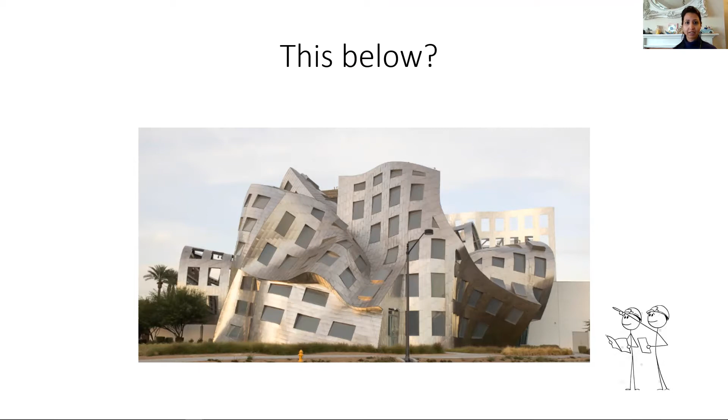Well, a vision that grand designs - the very inspiring television programs - has helped strengthen in the minds of the public. A question for you: do you think this has actually been built for human habitation, defying gravity and the way it looks? Well, it is the Lou Ruvo Center for Brain Health in Las Vegas. And then people think we will make interiors look like this, bright and splashy to keep you alert during the day. Well, maybe this might not be everyone's cup of tea, I understand.

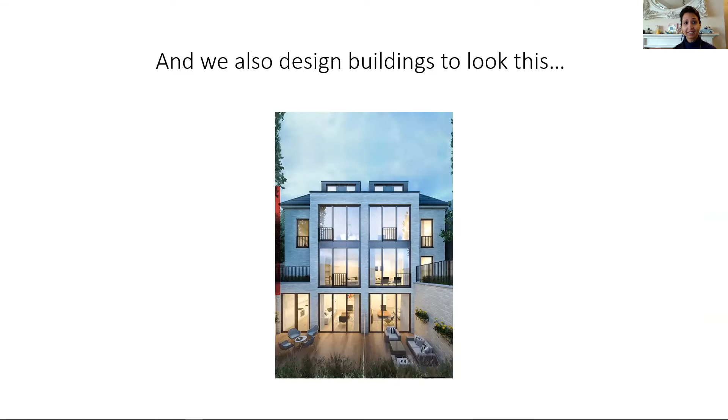We also design some very symmetrically proportioned buildings like this, and interiors that are inherently calm due to the selection of colors, textures, and materials. So all of the images that you just saw were real designs. Moreover, they were happy places, which were meant to serve the function of the building and cater to the taste of the occupants. A lot of people say that after buying a £1 million home, they have no money left to hire an architect.

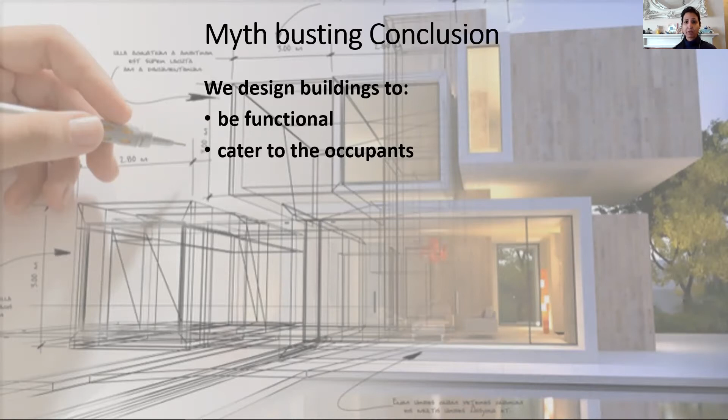Or they only have a £40,000 budget, which is too small to hire an architect for. Well, no budget is too small to be designed for. Every space is worth engineering, and you will find different design practices that will take up projects of varying budgets. The good job of an architect or a designer is to design to your needs, to fit your budget.

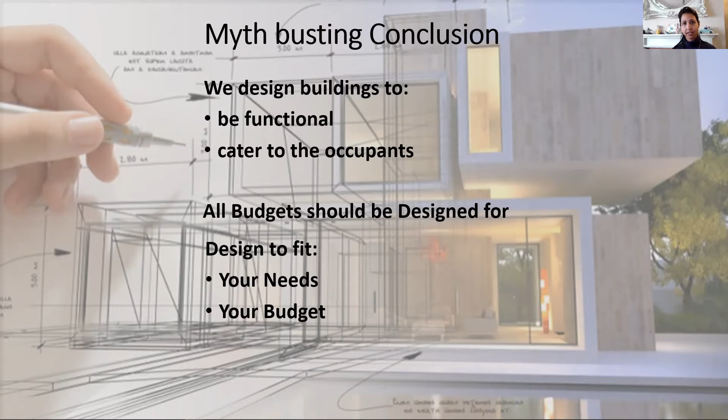Now, with these conclusions in mind, let's answer the next question: what is design, and how are architects connected to design? So let's first clarify who architects are. Well, they have been defined as someone who solves a problem you didn't know you had, in a way you don't understand. Let's try and demystify this, or give another definition.

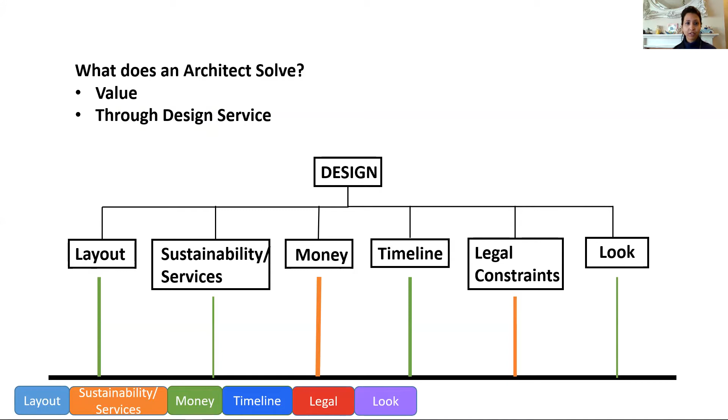So let's start with the first one: the layout. You can see the tabs on the bottom left will be highlighted as we go along.

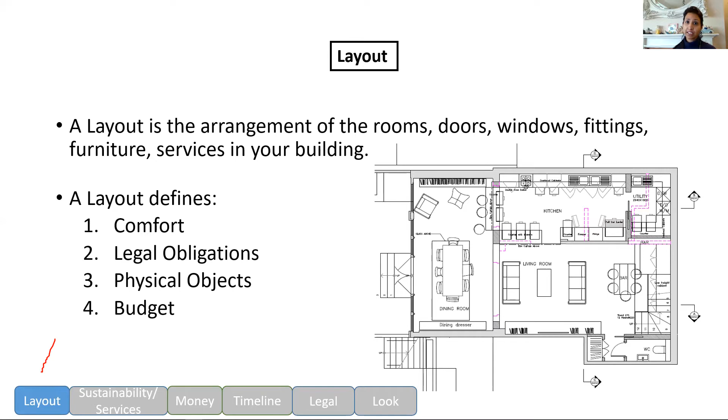It tells you the daily use of your building, guaranteeing comfort and ease. It will tell you the overall size of your building to make sure it satisfies your legal obligations. It will tell you the size of the furniture that you should buy later to fit in that space. And very importantly, it gives you the first indication of money that is needed to build it, so it will define your budget.

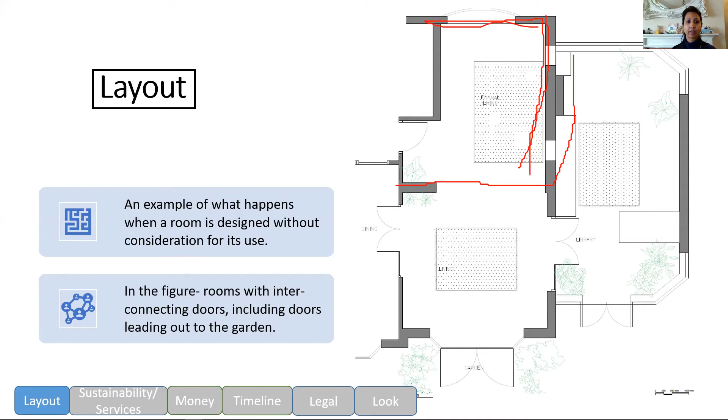Now let's come to a real life example of what happens when your layout is not properly made. A dear friend, who was not a friend at that time, had instructed this extension. Let me show you what they had. So all these red lines, which are not very straight, as you can see the ones I'm drawing, so all this bound by the red lines on this side was what they already had, and they wanted to extend by adding another living room.

So this was the existing living room. They wanted to add another living room and a huge library that you could see here. And they wanted to make the most of their rear garden on this side.

So what usually happens is, when you don't have these sort of plans in your hand, and there's no designer or architect working for you, you stand on the site with the builder and instruct them. You tell them that you would like a lovely connection from your existing dining into your new living, and then further into your library. And then from your current living room or your foyer, you want to enter your new living room and walk out through those beautiful double doors to your garden. Similarly, through your library, you walk out into your garden.

Now you see that there is an absence of your furniture, or the way you will use your rooms, in this particular plan. So this absence of furniture of the correct size, and the doors and windows together, gives rise to unexpected scenarios after the building is complete. Let's have a look what happened.

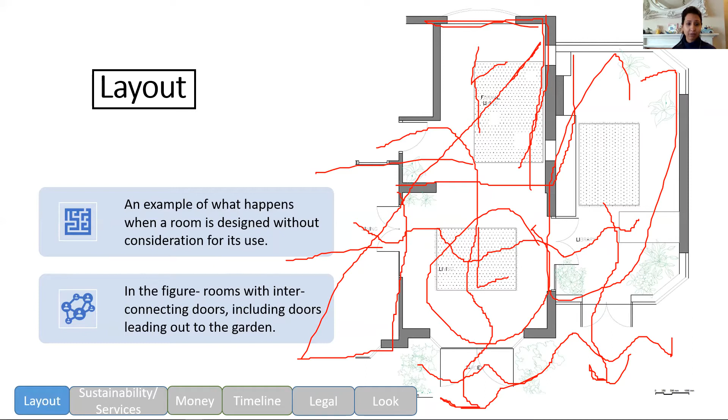So when you place the furniture, it lands bang in the middle of your door opening. So from your dining, you cannot move out to your new living because there is a sofa here. From your new living, you can't connect to the library because there is a two-seater here blocking. And you cannot access your beautiful garden through these lovely double doors because there's a grand three-seater right in the middle of it.

So the pink shaded area that you see on the screen here is the active circulation between the rooms, which was planned, but at every stage it is obstructed by a necessary piece of furniture. So it's a very hard compromise to make now after everything is built.

This can easily be avoided by designing the layout using the correct furniture. And this is the first thing your architect or your designer will make for you, to ensure that you arrive at the best solution for your room. So you would have saved money at the end by not ordering these double doors here, here, and here. You could have used fixed glazing, fixed doors, which are cheaper, or relocated these doors in such a way that you would have made your space work more efficiently, giving you everything you want.

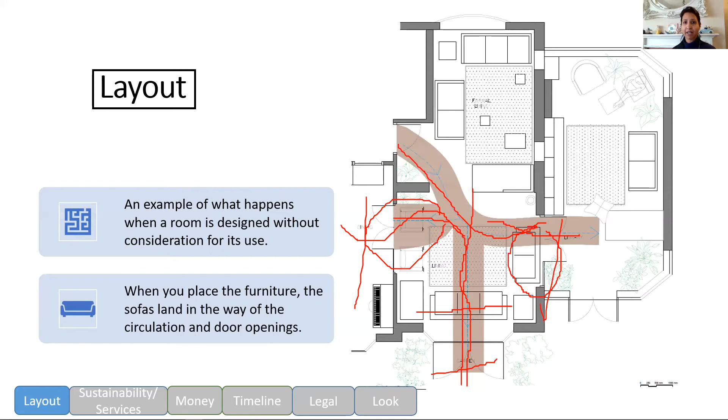Now, we designed the layout after doing a full site analysis, with the aim of the site analysis being to maximize the benefits that are already available to you through your existing surroundings, which would be your existing house or some trees, the sun path, and your natural site conditions, the way the sun and the wind behave on your particular site. And we also do not give one layout.

There are various feasible options for your requirements and the site. So like you can see here, all these three drawings are made for a rear extension option for the same family. So we make a few options which check the extent, the size, the depth, the dimension, and the width of your extension so that it fits within your legal obligations to the council. Then it also checks the various furniture arrangements so that nothing clashes with your doors and windows where you're sitting. And you see there are dimensions on these drawings.

All our drawings are dimensioned so that you clearly know what is the volume, what is the size, and whether it fits in the permitted development scheme of the council, or whether you will have to apply for planning permission.

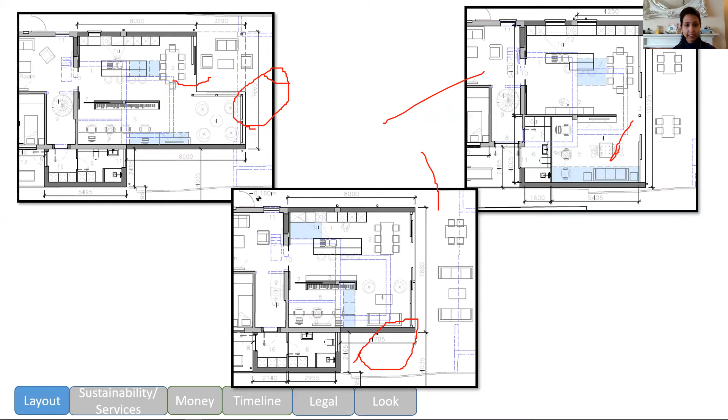This is also further looked at in a 3D view. Let's have a look at what that is. You see this is the same 3D view for the same family that I just showed you in plan, in the layout. So why is this done? So that you can check what sort of roof you want at the end of it.

Here we've introduced a green roof, and this is a cutout in the roof where you could have an awning or a pergola.

This is also done so that you can place your roof lights or skylights in the right places. If you miss putting them in your extension, you will have to spend more on electricity bills to brighten up the dark corners of your house, and you will also deprive your body of the natural nourishment needed to keep you in good mood and good health.

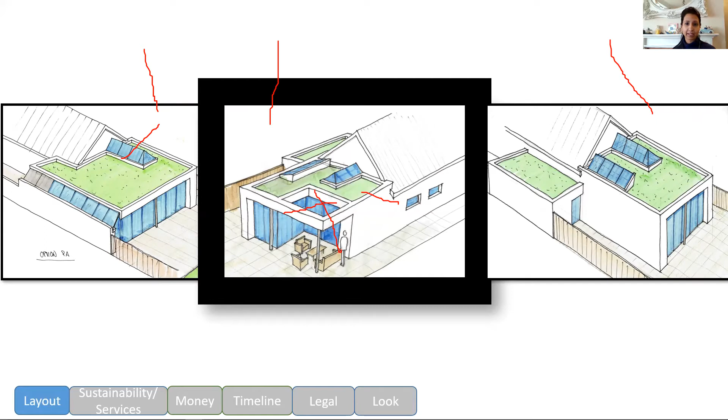Now is also the time to decide how many doors you want, these glass doors, how many of them you want to open, how many can just remain closed, which will affect your budget. What type of doors do you want? They could be bifold, pivoted, or sliding folding. The material of the doors could be plastic, which is UPVC, or steel, or a composite between aluminium and wood. All these things will have a bearing on the timeline of your project and your budget, of course.

Another important thing to decide here, especially in rear ground floor extensions, is the amount of paved area. It is cheaper to put grass everywhere, but if you put some paved area, you might want to use it for sitting down and having a picnic or a barbecue, because the lawns here are mostly wet and damp through most of the year. So plan for some paved area as well.

Now, all these decisions that we talked about will give rise to a set of planning drawings. These drawings will be submitted to your council so that they can approve it and your extension is legally allowed. We do rigorous checks while designing everything for you to save you future headache.

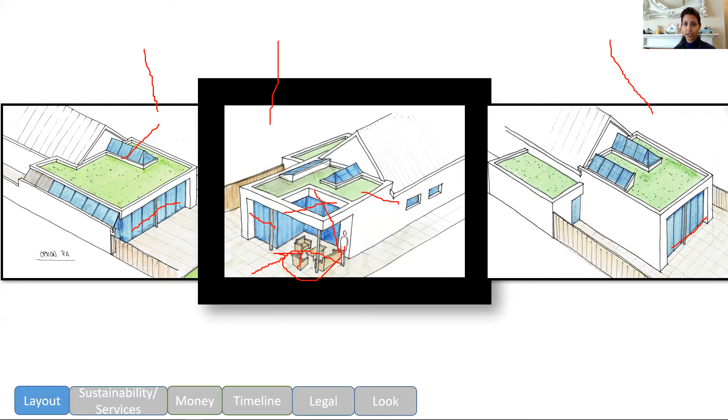You might hear a lot of advice from people saying that your extension comes under the permitted development rules of the council, so you do not need to apply for planning permission. As that may be, we do not recommend starting construction before getting prior approval from the local council. Your architect will develop the best layout option for you, which would be the first milestone of your project to save you time, money, and other legal headache.

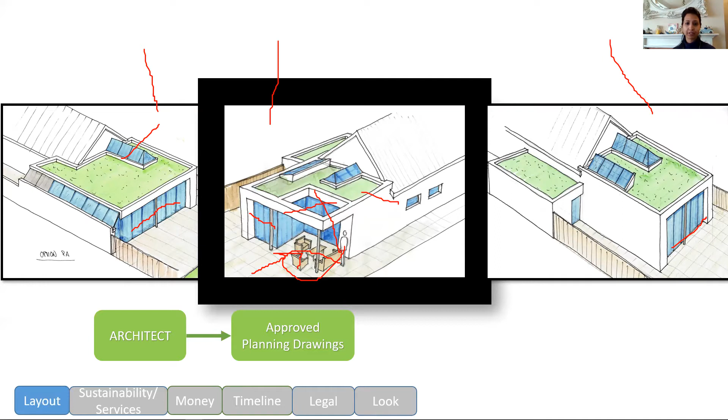So that is what I was trying to tell you. An architect will make a set of approved planning drawings for you. Now, the second tab that I chose to highlight was the sustainability and services of a building.

What are the services in a building? Services would, for example, include things like the heating systems for your building, how you heat the water and the space, your fire alarms, security alarms, and all the pipes that carry away the wastewater from your kitchen, bathroom, and roofs.

A few examples I've used to explain this further are underfloor heating, where instead of radiators, you put the heating underneath the floor surface of your house. This is very common these days, it is trending and extremely useful, and there are broadly two types: electric and wet.

Next, more heating sources which form part of your building services are boilers, use of efficient boilers or hot water tanks as suited to the size of your family. You could use heat pumps to help with your heating needs, like air source heat pumps or ground source heat pumps. They're becoming very popular these days.

You could also install PV solar cells on the roof of the house, which will generate electricity for your own use and decrease your utility bills. You can feed back whatever extra you generate to the grid and earn some money.

The fourth tab I've chosen is MVHR, Mechanical Ventilation Heat Recovery System, which gives the air inside your house a purified quality. The air is very pure inside your house, and you can keep your doors and windows closed, and still get a natural, fresh circulation of air within your house.

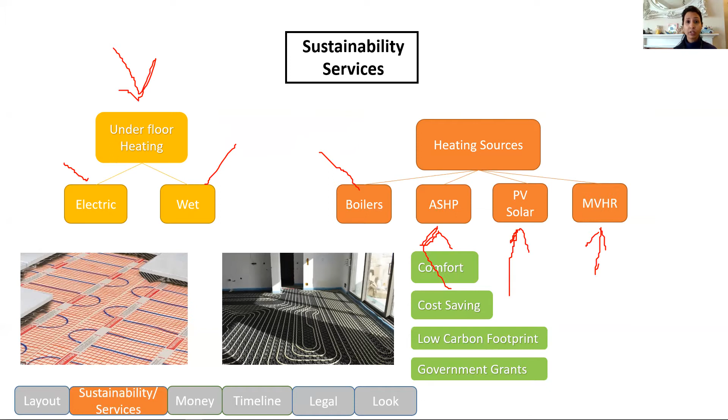Now we go on to the next heading, which we consider the most important building material on site, which is the homeowner's money, your budget. Now, how can you be sure that the budget you have decided will get you this set of deliverables at the end of your project? There are three ways to know that, and I shall discuss briefly each one of them.

That is because this type of planning drawing offers no clarity on the items being put in your building. So when there is no clarity on what is inside the building, any and every cost given to you is correct, and the judge of that cost will be your builder. So if you're happy to hand over this control to one party, then this first option of determining your budget and also your timeline should not be bothersome.

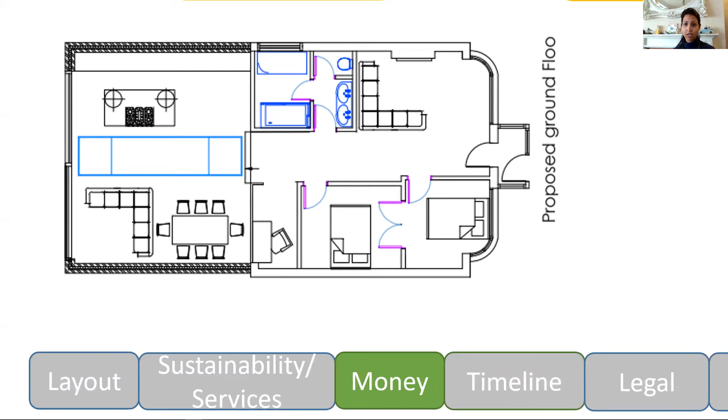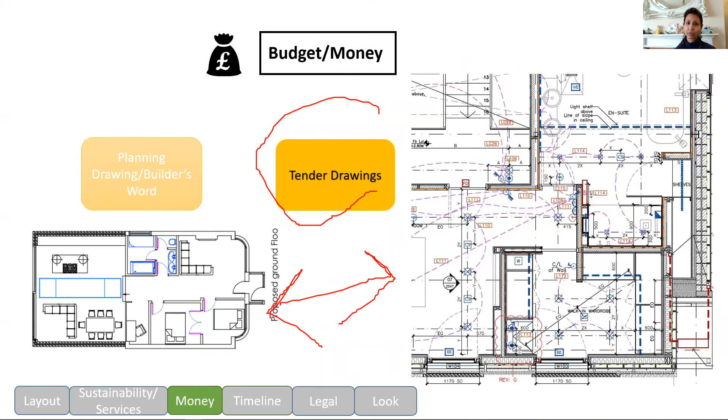We can play spot the 5 differences between these two, but I'm sure we will all end up with something like 500 differences. So please remember that these tender drawings, they set your expectations, written down as a formal contract between you and the builder. These drawings are the proof of what you are paying the builder. Anything less than this will leave you exposed to the situation of I said this, he said this, and at the end, no one comes out the winner.

Let's talk about the timeline. Do you have a date by which your project will complete? Are you living on site? Are you renting elsewhere? Many people tell me that the builder will complete my site as soon as possible because he has to move to a new site to make more money. This is true, but only in part. The builder will shift his team from your site to accommodate his schedule. But whether your building will be complete at that point is no surety.

If you cannot control the completion date of your project, then you will have to pay more in off-site rent and inconvenience. A signed contract between you and the builder can control this completion date.

Companies like JCT and RIBA have ready available contracts online that you can download and sign between yourself and the builder. The architect helps you choose the correct contract for your type of project, and he facilitates and negotiates this contract with your builder when your construction is ongoing. The architect will use measures, or let's say powers, provided in this contract to make your project delivery as smooth as possible based on the cost and the timelines.

Now, how does your architect run your construction contract? He does that by taking on the duty of a contract administrator during the time your extension is being built. And what does the contract administrator do? He will tell you the amount of money that you have to pay to your builder at regular intervals. He will perform checks on your structure that is being built. Those checks can be done every fortnightly or monthly.

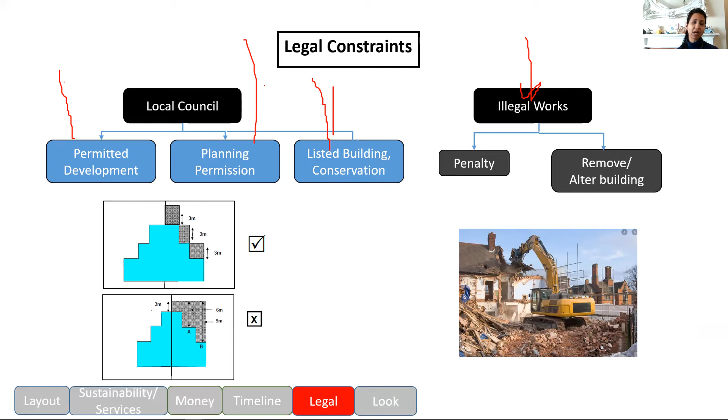You can check this information online, or your architect will tell you all of this right at the start. If you don't apply for these permissions, you will fall foul of the law, and they have the power to take you to court, to remove the illegal building and to recover the costs from you. So your architect will make sure that the design and layout complies with the law, so none of these ugly things happen.

Another legal aspect is that there are some legal authorities that need proof that your structure is safe. These are the Building Regulations Authority and the CDM regulations. These confirm the health and safety of the building, its occupants, and also the safety of your site and the laborers working on your site when it is under construction. Your architect will clearly inform you of his duties under this act, of your duties as the site owner, and of your builder, because all three of these people have some duties pertaining to your construction.

Then another legal thing is the party wall awards. These are legal documents of agreement between you and your next door neighbors that depend on the closeness of your extension to your neighbor's house. This is also put in place to help you build with complete control on your property, and it lets your neighbors do the same on their property.

Your architect will advise you if your extension requires the consultation of an external party wall surveyor, or whether it can be managed by issuing standard notices to your neighbors. The mandatory period of giving a notice and then starting work is anywhere between 30 to 60 days after you give your notice to your neighbors. You do not want to start your construction before sending out the proper notices, because your neighbors can get a legal injunction to stop works on your site till all this is sorted out.

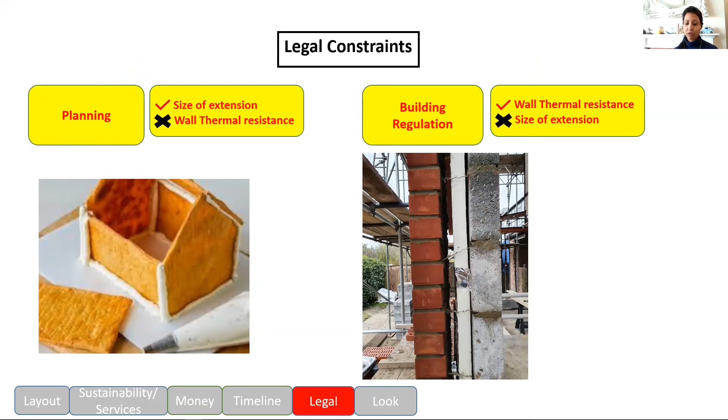Now planning permission, on the other hand, doesn't care if you make your walls out of cream cheese crackers, as long as you don't exceed the limits they have imposed on the overall size of your extension. So there are different authorities, and you need certifications from both of them to stay within the law. An architect makes sure that you get these certifications instead of a legal notice, a penalty fine, a court case, or the removal of your illegal extension.

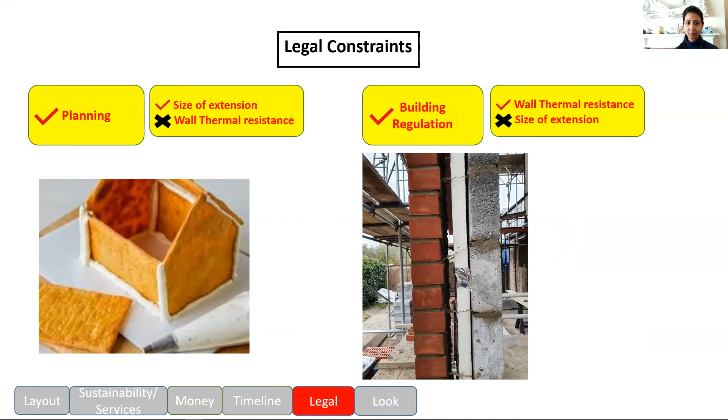So to avoid such huge disappointments, please own a set of complete drawings before you start your construction, before you agree a price on your building. Have a signed contract with your builder, which will hold him to his promises of delivery and quality, and it will hold you to your promise of paying the builder on time. You should know what you're paying for.

This document will describe the quality that you're looking for in your building. It will clearly tell you the model numbers of the light fittings, the fixtures, what will go in your bathroom, the doors, windows, everything. So the architect prepares a set of drawings and written documents that clearly define the expectations for the builder, so he can understand your expectations clearly.

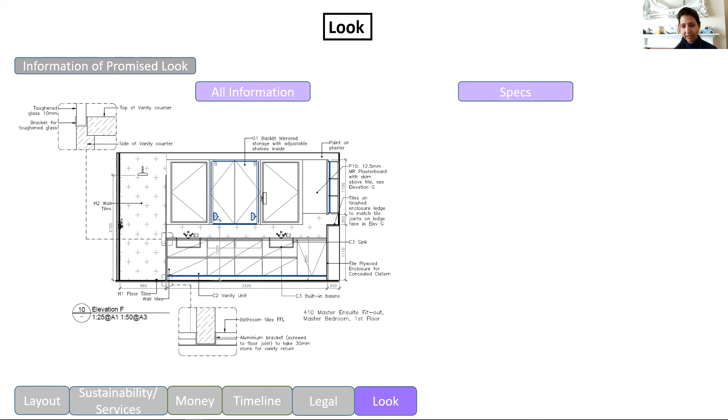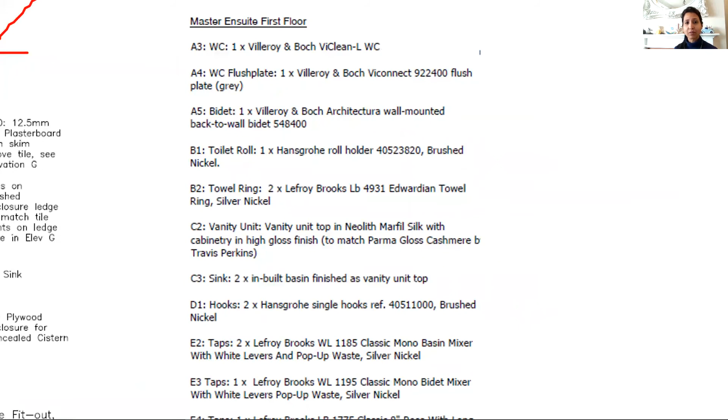Based on this complete set of drawings and documents, this is how the detailed drawing of that promised bathroom should have looked like. This is what it should have looked like, but they didn't have anything. Alongside, we also give a list of specifications where we describe each item that is to be put in your building, so that your builder can clearly understand what he has to make for you.

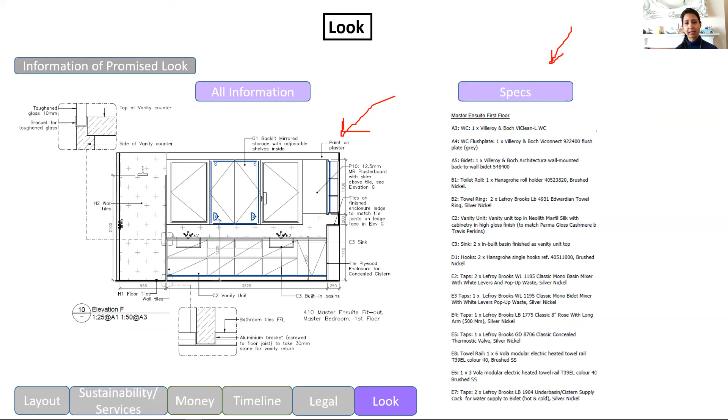Depending on this, he will price the building for you, and then he will use these drawings further to build that physically. Now, all these that we talked about were tangible effects of a design of your building. So how does design affect you? Let's look at this project we did in London.

So to describe design in a holistic manner, it should elevate your daily experience of life in your own house. It should give your body access to more natural light, air, and the beautiful garden views, which are at a high premium in our city, and everyone should utilize them fully.

It also increases the value of your house and gives you a better return on investment that you have made on your extension, dormer, or rear, or wherever you have done it.

Imagine getting out of bed on a chilly morning with a clear panoramic view of your garden without wearing socks, because you installed underfloor heating in your bedroom. Then you walk bare feet into your bathroom, which has a tiled porcelain floor. Again, that floor is warm because your architect advised you to use electric or wet underfloor heating in both these rooms.

So think of an architect's input or service like buying a bespoke car for your family. The architect will not make this car in his office, but he will design it for you, focusing on everything you need, and label all of that clearly with your timeline and budget, controlling this design. This information will be used by the car manufacturers to make and deliver the car for you, which is what the builder does by making your building. In between, you have to continuously make payments to the manufacturer of the car so that the progress is smooth.

We inspect the car's progress and tell you how much you should pay the manufacturers every two weeks for the way your car is shaping up. Many weeks are spent controlling this customized outcome, and this is where your architect is guiding the process.

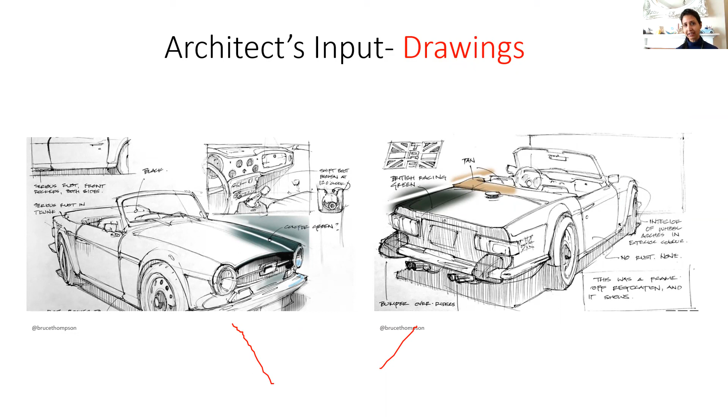The instant gratification of buying a standard car from a showroom is a tad delayed while you create the car of your dreams. After this tempting car photograph, I will show you some equally tempting building photos that we transformed to suit specific homeowner needs.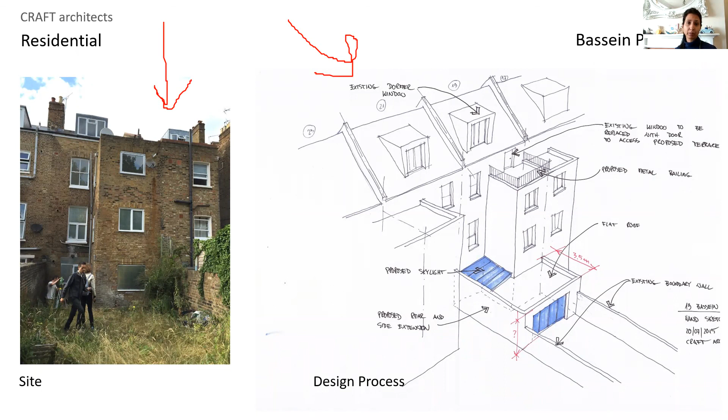So you see this existing site photo on the left side here, and this is the process of how we initiate the design by talking to the homeowners. This is like a rough sketch of the needs of the homeowners that should fit within the planning or development permissions, while keeping the budget in mind.

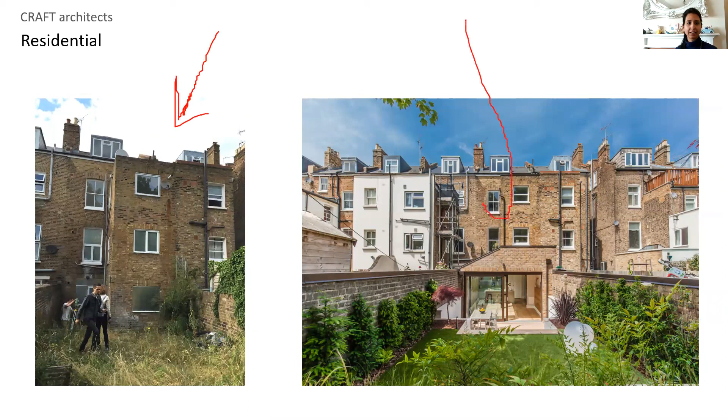This, like I showed you before, was the listed building. This is how it started, and this is how it ended with the rear extension in their garden here.

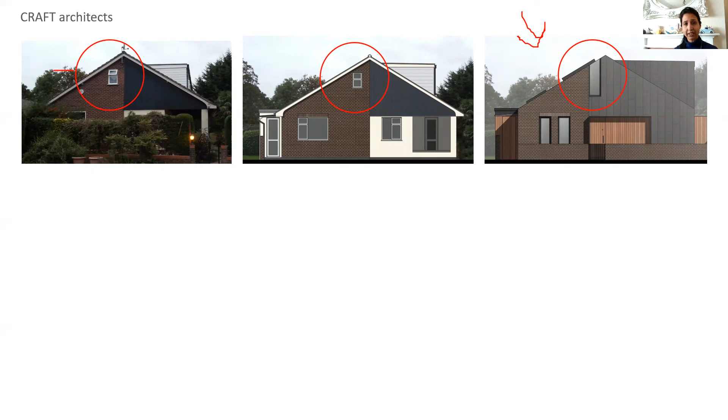To get to this buildable reality that you see on the right hand side, we need to draw detailed technical drawings that show the coordination of different building materials and fixing details, while everything satisfies the law, which is the building regulations and the planning permission if you have got one.

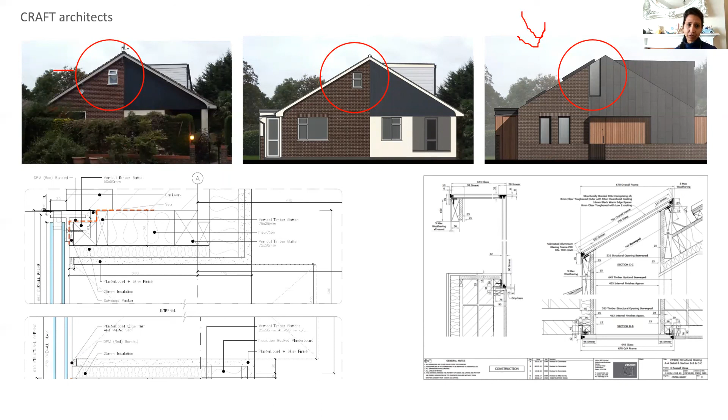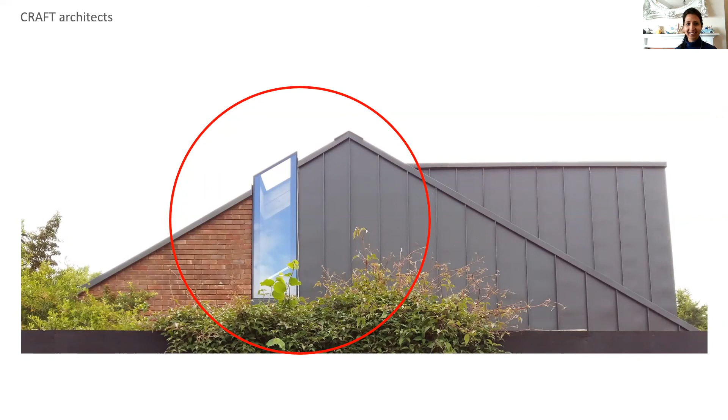Now you will see the real installed window. Imagine yourself under that double height space inside the house, gazing at the sky from all angles. This was beautiful on site.

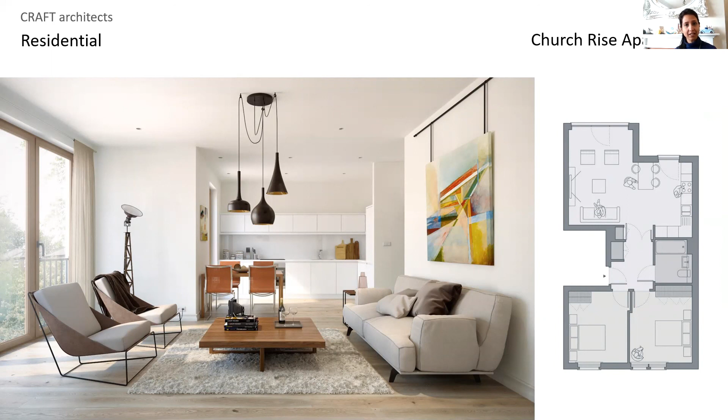It clarifies the intent and the outcome at a very early stage for everyone. It's important for developers to sell the properties before they are fully furnished, and these images help convey the true message to everyone.